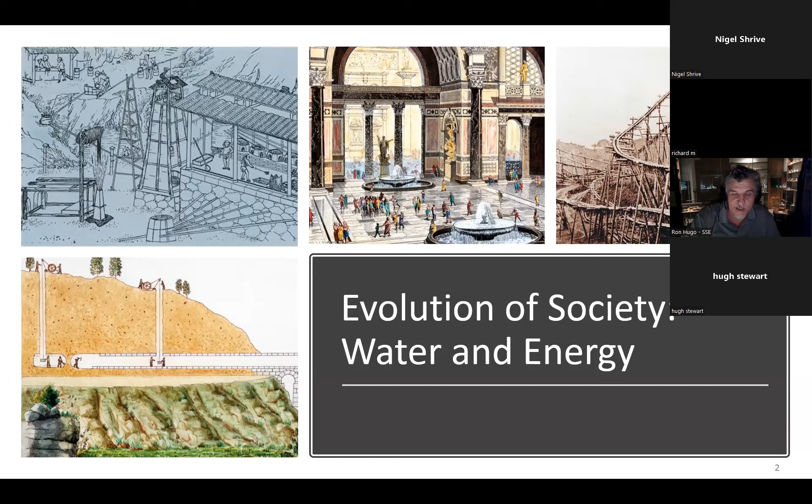So if you look back at the evolution of society, there have been a couple of things that have been very instrumental in terms of that evolution, and two of those have been potable water as well as energy. And we can look at a number of different civilizations that developed as a result of the benefit of pipelines. And one of the oldest pipelines is the Aqua Appia, and that was built by the Romans, and it was in 312 BC.

And what it enabled was fresh water to be brought into ancient Rome. So there's the Colosseum, and then there's a very large aqueduct that comes through. But the water was brought into the cattle market, which is right up in this area here. And you can actually still go there today and see the area where they were bringing that water. So they brought in fresh water, and that enabled Rome to grow into the largest city at the time, or in human history to that point. And part of it was the fact that they had good water and they also had good sanitation.

Now, flash forward a couple hundred years and we get to ancient China, and the ancient Chinese, they needed salt. They were using salt for preserving food and for many other purposes for cooking. And the place where they were getting the salt from was from salt brine. And the process that they used in order to boil off the water and have just salt at the end was using natural gas or methane that was coming out of the ground.

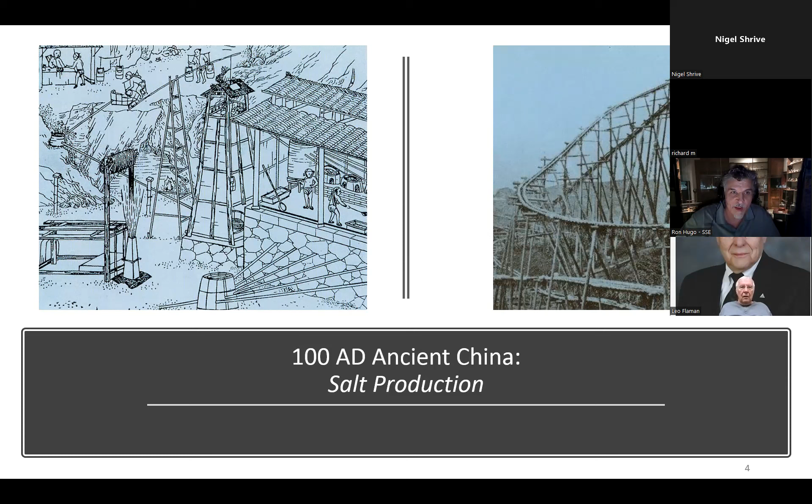So they were using bamboo pipelines to route both the natural gas as well as the salt water. And it was a very, very big operation. And that enabled their civilization to advance through the use of these round conduits that we today call pipelines.

Now, going even further forward in time, we look at the evolution and the development of Canada, and one of the things that enabled the development of Canada was the Homestead Act, and that was whereby people came out and they were given a quarter section of land, and they had to develop it within a certain amount of time. And if they were able to turn it into land that was cultivated and produced, they were then given that land through the Homestead Act.

And the picture in the upper middle there, that's actually Calgary, and I think it was taken in 1880. And so that's the rail station of the Canadian Pacific Railroad, which is down by Fort Calgary today. So if we look at the gas distribution system within Alberta, it actually occurred in two different waves. One of them was occurring in around 1912, and that was with the discovery near Bow Island, which is near Medicine Hat. And that discovery came as CPR was coming through. They were looking for water for their steam locomotives, and they discovered gas as a result of that.

And then individuals went back and they produced that field, but it took 86 days to build a pipeline from Bow Island to Lethbridge and then to Calgary. And so Calgary received the first natural gas in 1912, and it took about a decade later for Edmonton to receive the natural gas, and that came from Viking, Alberta. And the reason for the delay was because World War I occurred in the interim there, and that delayed the development of the pipeline going into Edmonton.

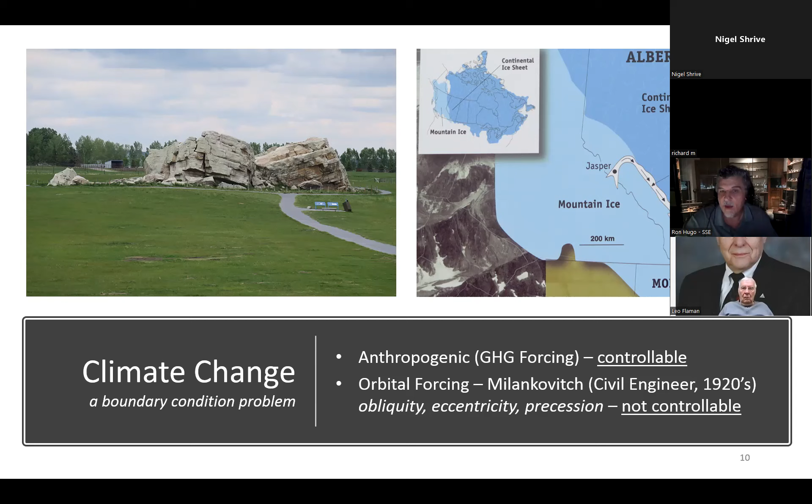He was a brilliant mathematician, did all kinds of calculations with orbital dynamics, and he came up with a theory saying that one of the main drivers of the glacial interglacial was this orbital forcing, which ultimately is due to the obliquity, the eccentricity, and the precession of the Earth's orbit. And so when you look at climate change, really it is a boundary condition problem. The Earth is just a thermal fluid system. You change the boundary conditions, you affect the way that it behaves, the average temperatures.

And so if we are to get to net zero by 2050, we need to ramp this up. So we're going to be transporting a lot of CO2 around. And how are we going to be transporting it? Well, one of the ways is going to be through pipelines as well. So anyways, what we're doing is we're using technology to address the greenhouse gas forcing.

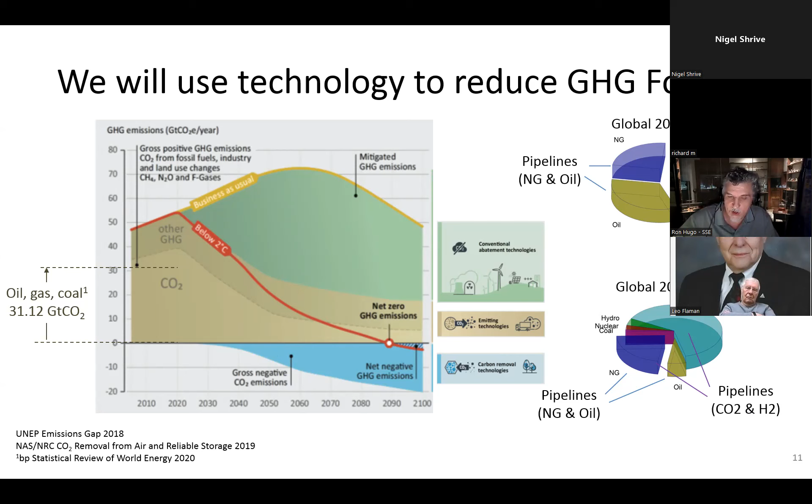And what we're seeing is a transition from natural gas and oil. Hydrogen is being proposed as one of the candidates that we can use as part of energy transition, which I'll talk a little bit more in the next slide. So this is one of the visions for energy transition, and what it involves is moving off of our carbon-based fuels, but replacing it with other sorts of gaseous and liquid fuels, ranging from hydrogen to synthetic fuels, biofuels,

ammonia. Ammonia typically, if you're going to be shipping this energy in liquid form from one continent to another by ship, but there may be some transported within the continent as well, and certainly a lot of CO2. As I showed in the last slide, we will be shipping more and more CO2 for various purposes, and so pipelines will need to be able to handle that as well. So that's the part that we can control.

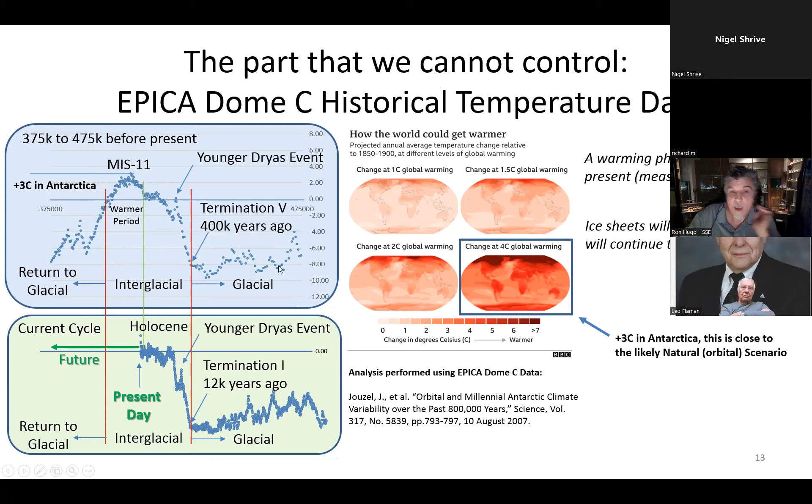This is in Antarctica. It was about 3 degrees Celsius above the pre-industrial, so the Holocene. So we're probably about a third of the way there, if we use this as a predictive thing. So what does that mean for infrastructure and for engineers?

Well, one thing for certain is it's going to introduce a lot more liquid, a lot more water into the Earth. So we will have water vapor in the atmosphere, and the oceans will rise. We'll have increased flooding. And so our infrastructure is going to have to deal with a lot more increased flooding.

And here I have a picture of the flooding that occurred last November near Vancouver in the Sumas Valley. And the Trans Mountain Pipeline actually makes its way right under where this area was flooded. Now, luckily, Trans Mountain is a liquid line, and so it stays in the ground.

But had it been a gas line, it would be possible for it to pop up and out of the ground, which then results in undue stress on the pipeline, creating threats and concerns. And there were also regions where there was significant washout of the Trans Mountain, and that's why it was shut down for a fairly extended period of time.

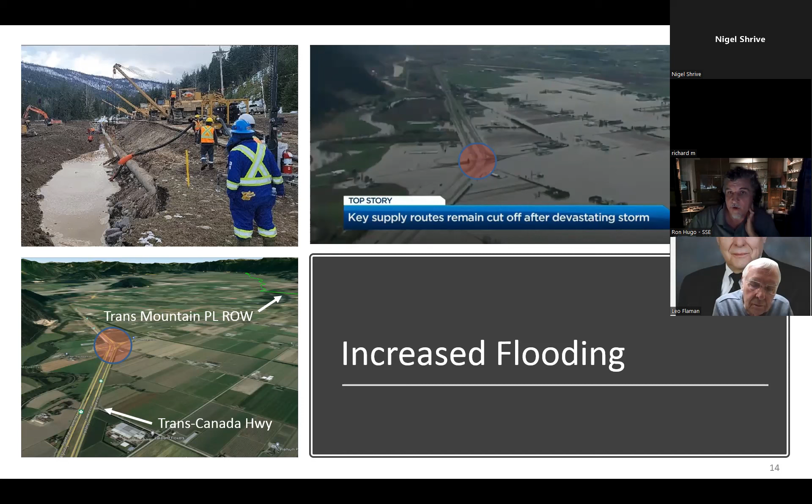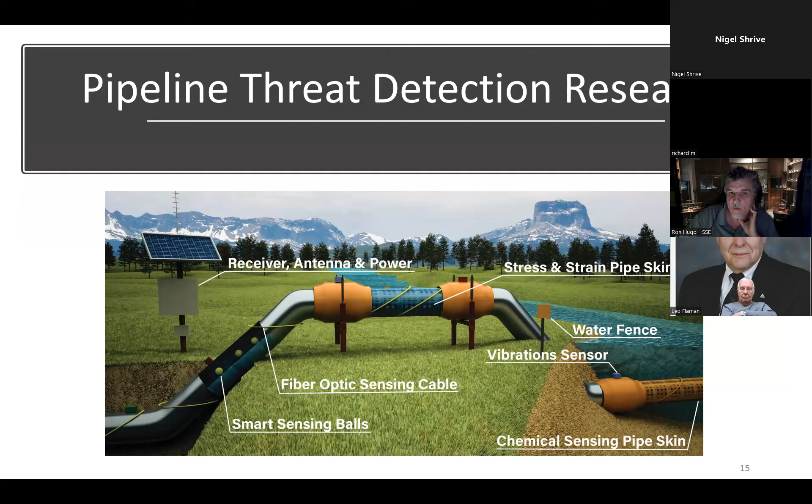So what are we doing in order to address this? Well, we're looking at pipeline threat detection research, and that's what I want to now spend a bit of time talking about. We're looking at many different ways of being able to measure the state of the pipeline, and to be able to determine whether or not it's in a scenario where there could be problems arising. Ideally, being able to determine those concerns before you have an incident, before you have a loss of fluid event.

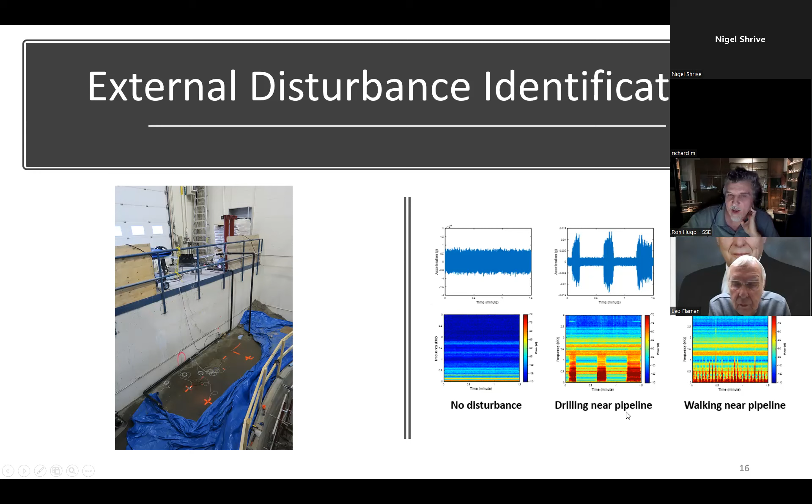And so one of the experiments that we were doing here was external disturbance identification. Could we distinguish different types of external disturbances based on the sensors that we had on the pipeline? And so on the right, you can see some of the data streams that we collected. So no disturbance, drilling near a pipe, walking near the pipeline. We had running, we had all different types of activities, but we collected enormous amounts of data.

And then what we did is we used artificial intelligence, machine learning approaches. And this is where the trick in all of these things is. You have to process the data in the right way. And so that's where we spend the majority of our time, is understanding the best way to process that data. But when we do that, we're then able to determine the external threat fairly accurately.

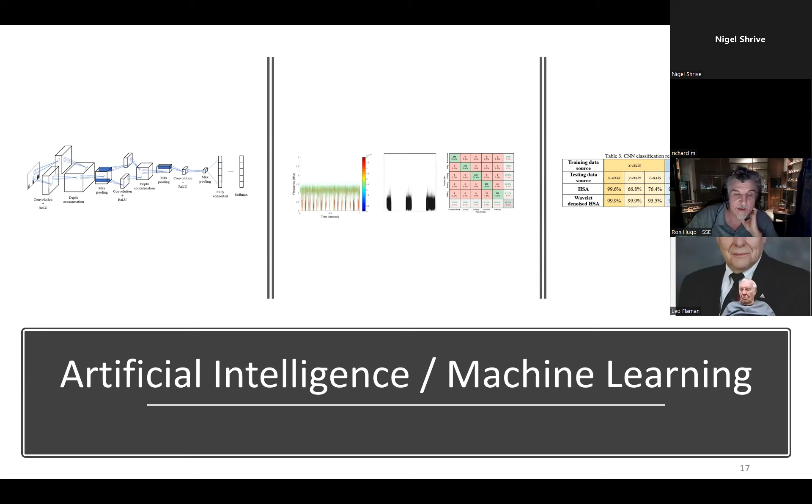And we're using triaxial accelerometers in the measurements that we're using. Different signal conditioning approaches result in better results there. But we're able to detect all of the different disturbances, and not only know that there's a disturbance there, but we're also able to identify what type of disturbance it is. So that's one of the things that we've been working on.

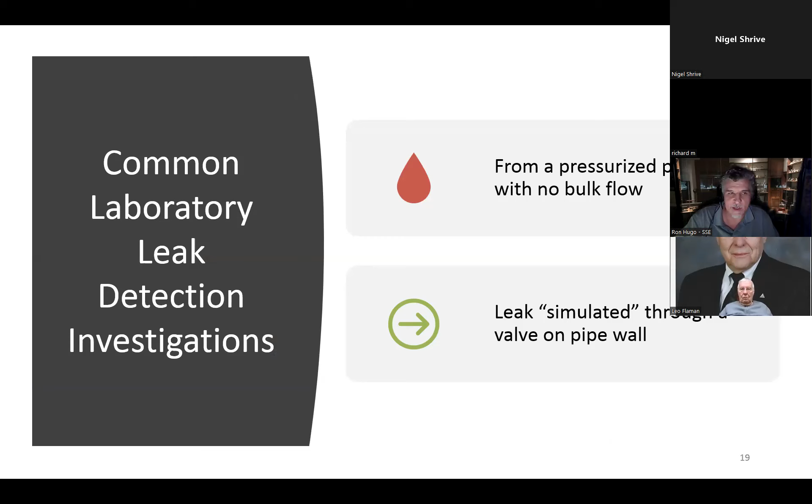So common laboratory leak detection investigations involve a leak from a pressurized pipe. Sometimes there's not even a bulk flow within the pipe. It's just a pressurized pipe with no bulk flow going through it. And the leak is oftentimes simulated with a valve on the pipe wall, which is not a very good boundary condition. It's far from reality of what you would have in an actual leak event.

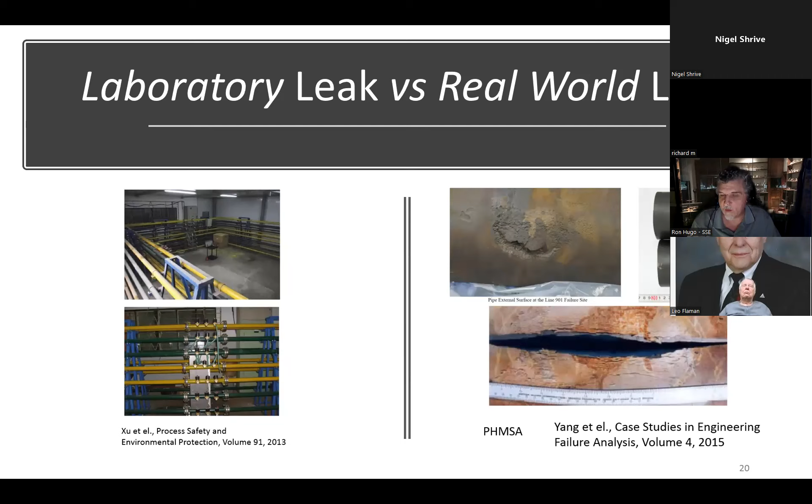They could be axial, they could be circumferential. And so the geometry of a leak is much more complicated than what we normally are simulating in our laboratory investigations. And so what we ask is, is there a better way that we can study leaks, ideally by trying to replicate the morphology of what actually occurs when you have a real leak.

And so in order to do that, what we're doing is designing and building a new flow facility. It will be in what we call APRIL, the Advanced Pipeline Research and Innovation Laboratory. The unique aspect of this flow facility is, first of all, we have multiple loops or lines where we can do different investigations. We'll be able to flow liquids of various viscosities at up to about 50% operational Reynolds number that you'd find in a transmission pipeline.

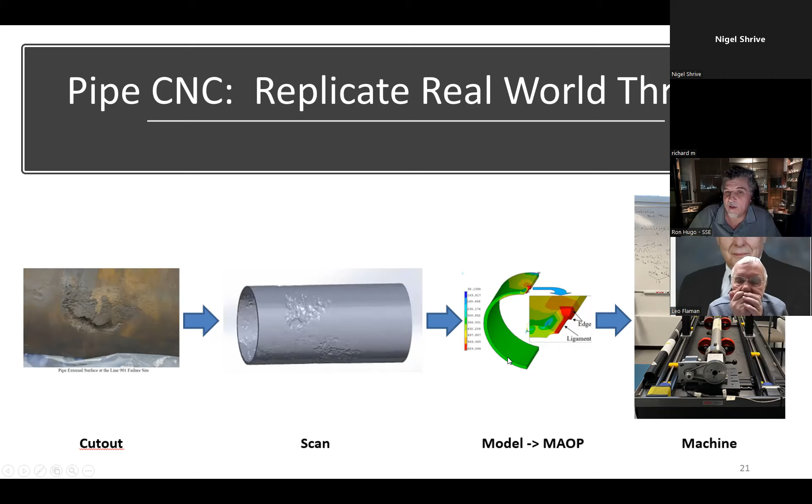So in this earlier slide here, when I was showing you the finite element modeling, we want to know that our pipe will fail at, let's say, 40 psi, so that we can slowly bring the pressure up when the damaged pipe section is in our flow facility, and then study the dynamics of the leak itself. And we can heat the fluid and we can cool the fluid. So we have a lot of flexibility with this flow facility, and we're hoping that it'll be operational sometime in the spring semester.

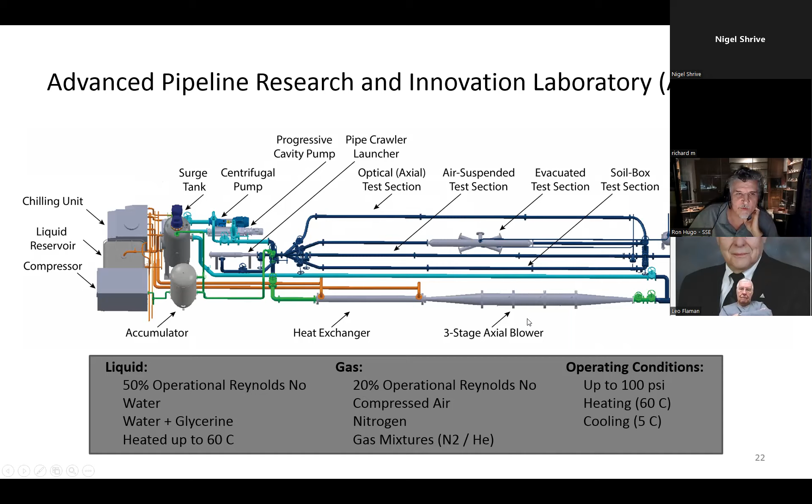So that's APRIL. And now I want to shift gears a little bit. I did touch on hydrogen blending. Here we have nitrogen and helium because I don't want to put hydrogen in this flow facility. But in order to study hydrogen, we do have another smaller flow facility that we've been using. And this is looking at hydrogen blending scenarios for customer side piping. So there's a lot of discussion about blending hydrogen into the natural gas distribution system.

And one of the things that you find when you look at this is that when you look at the gas coming into your house, for example, you can have a wide range of conditions. First of all, it depends on what the draw is on your natural gas. So if it's just your pilot light, the Reynolds number of the gas flow here is very laminar. It's around 32. Your stove, your oven, your dryer, your furnace, once you get the furnace on, you'll go up into the transitional, into the turbulent flow regime. So the flow dynamics change quite significantly based on what appliance is drawing the natural gas.

The other thing is that you can have a flow scenario where you have flow. If you turn off all of your appliances, you have no flow. And so you can have a scenario where there's no flow for fairly long periods of time. You can have horizontal flow, you can have vertical flow.

And in terms of the Reynolds number, the flow could be laminar, it could be transitional, it could be turbulent. The other thing that we should say is natural gas, the density is around 0.7. And if you look at hydrogen, the density is much, much lower, 0.08. So we have a scenario where we can have stratified flow depending upon the Reynolds number at which we're flowing, which all introduces interesting dynamics into what really is going on within the pipe.

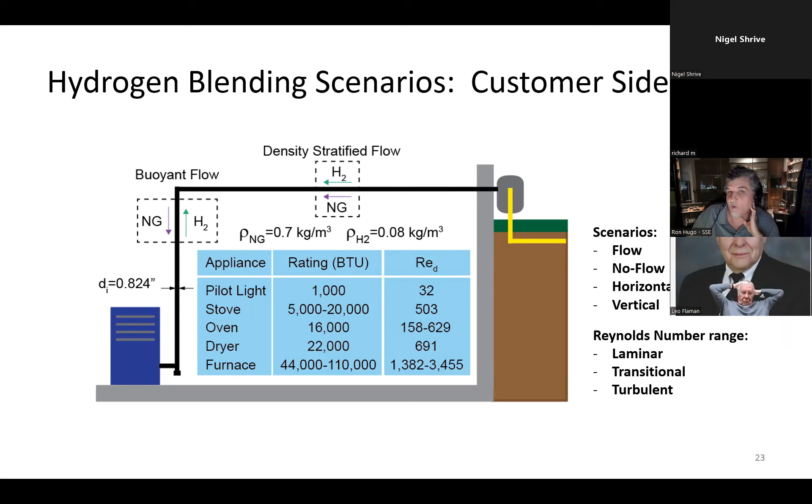So in order to investigate that, what we've done is we built another flow facility. This is a much smaller one from the one that I showed you earlier, April. But what we can do with this facility is we can charge it with whatever kind of gases we want. And so typically what we've been investigating has been methane with hydrogen. And we look at various blends. So we'll look at 5% hydrogen, 10%, 20%. We've gone up to 30%.

And we also look at proxy gases as well. Sometimes we'll look at nitrogen and helium, and they actually do a very good job of mimicking the behavior of what you would get with methane and hydrogen. So we can put whatever kind of gas we want into the system.

We can do tests where we intentionally initiate a leak, not using the natural process. This is using a valve, but we can initiate a leak so that the gas comes through the system, comes up into this test section, comes back down, and comes through a pump. So it's basically a closed flow loop where the gas is circulating. We can change the Reynolds number. We can stop the flow, observe what's happening with time.

So how do we observe? The way that we do it is we have an optical measurement where we're transmitting down the length of the pipe. And what we do is we use a collimated helium neon laser beam. The inner diameter of the pipe is around 0.8 inches. It's a 3/4 inch black pipe that you'd find in your house. And with that, we have what's called a Shack-Hartmann wavefront sensor, where we're able to measure the optical aberration on the light going through the system.

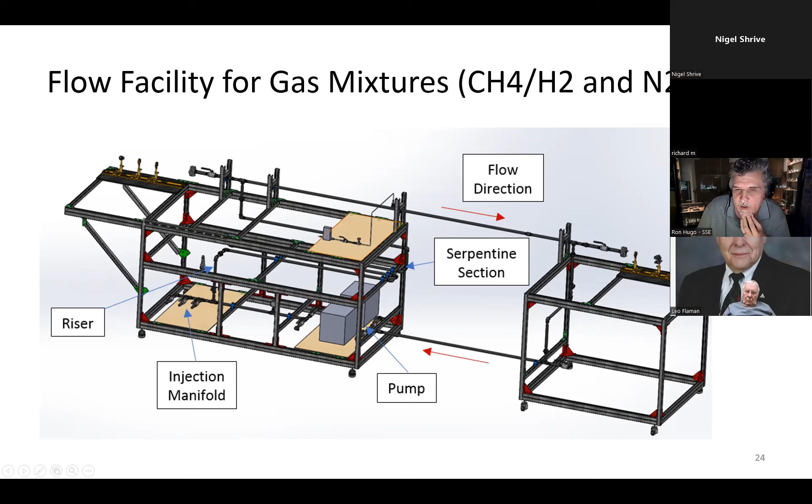So what I'm going to show you now, this is a video collected after charging the system. We evacuate it entirely with the vacuum pump, and then we charge it with methane, and then we top it up with hydrogen. And so when we top it up with hydrogen, the hydrogen goes into this area here, and it doesn't diffuse very rapidly. It actually likes to kind of sit right close to where you inject it. And then what we do is we turn on the pump. And so the video that I'm going to show you is what is collected when you look down the length of the test section once you start the pump.

And so here will be the start of it. And you'll see, so the pump is on now. This is the intensity of the beam. I've sped this up. The beam disappears completely. That's the first pocket of hydrogen coming through. That's the second pass of hydrogen coming through. So the hydrogen is going all the way around our flow loop. It takes about 30 seconds for the hydrogen to make it around the flow loop once.

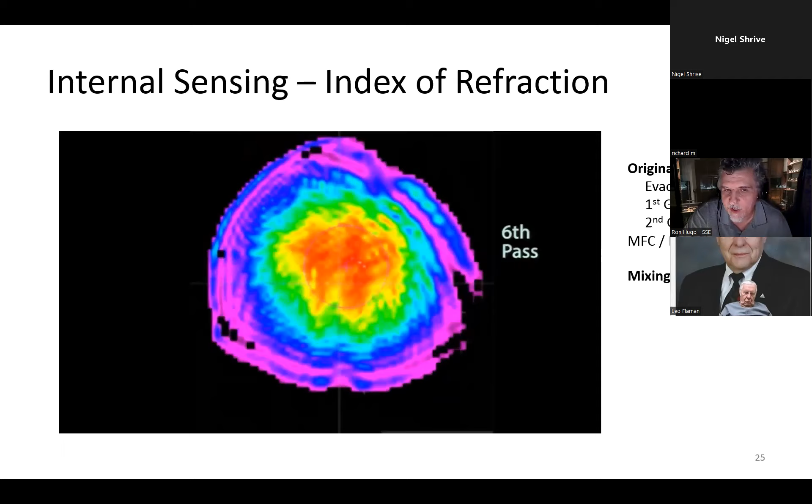And then as you keep going, what you'll find is the beam doesn't disappear. And that's because even though we're at a laminar Reynolds number of 650, we have around 20 elbows in this system. And so those are generating separated flow, resulting in mixing of the hydrogen and the methane. And so with each additional pass, you'll see that the optical variation is not as significant.

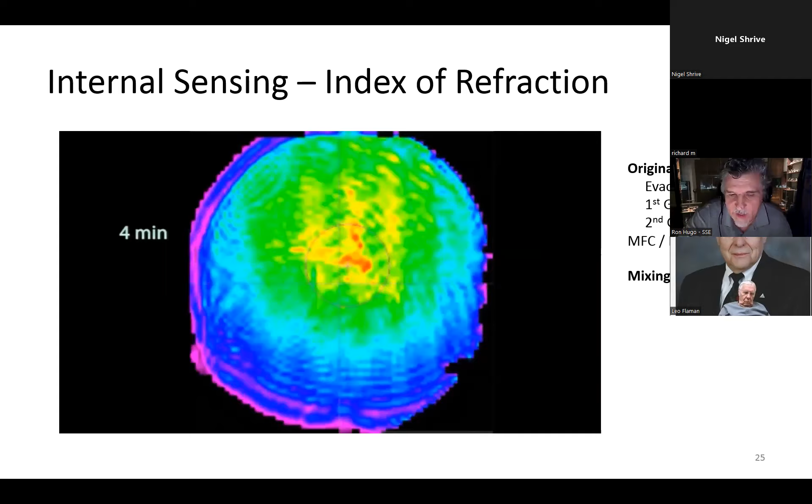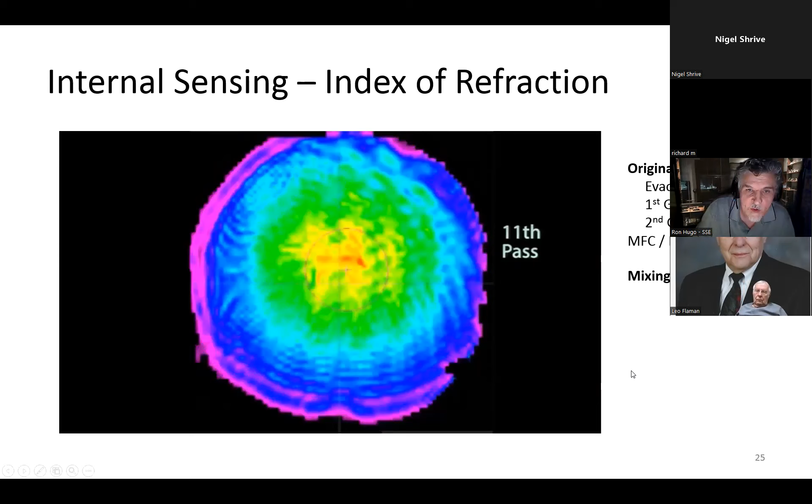And then eventually, if you run this long enough, you won't even be able to see a change, because then you're in the fully mixed state of the system, which incidentally is probably what you would get. Well, not probably, it is what you would get with the distribution system within the city if they were to deliver the natural gas to your house. So that is what the screenshots look like if you look at it at various points in time.

But what we can do with this information is we can do quantitative analysis of it, and we can start to understand how long it takes to mix, what happens if you turn the system off for, let's say, a week, and then your furnace comes on again, what type of thing is happening within the flow. So we're able to get quantitative measures out of this data to understand what will be the character of these blends coming into your house.

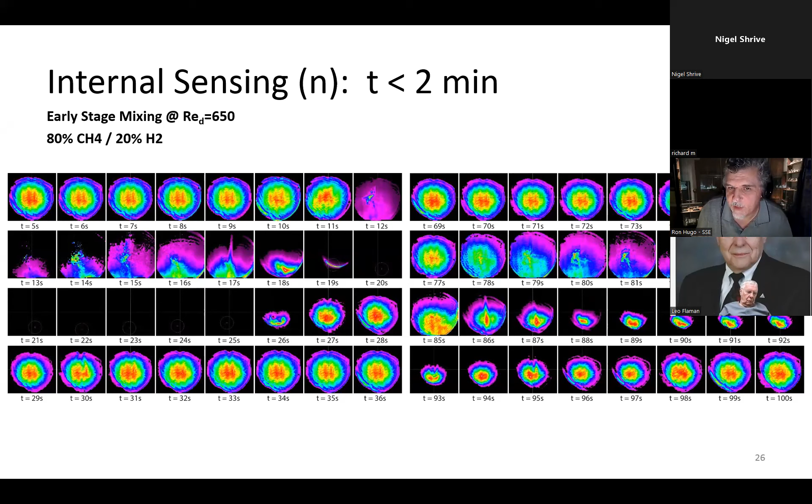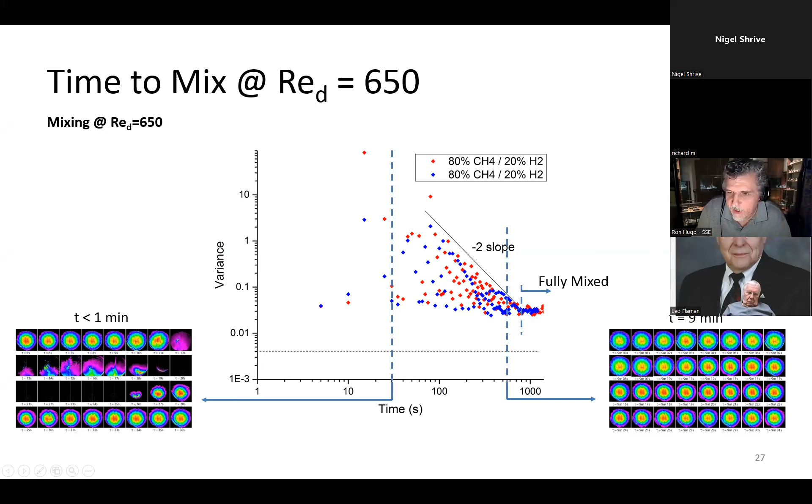So that's the initial charge in the mixing, which you probably would never find in your house if they were bringing in this type of a blend. The other thing that we can do, let's say we've mixed it, fully mixed, we turn the pump off and we let it sit for a week. And then we come back and we turn the pump on for 30 minutes and then we turn the pump off. So we perform that experiment and we look at what's happening.

Now, this data might look significant in terms of, oh, there's a lot of stuff going on. You got to remember here, the variance was going up to 10. Here I'm showing variance 0.04. So very, very moderate optical activity coming through the system. But again, what we can do, we can get an understanding as to how much stratification might occur within the system if you let it sit.

So what would stratification mean? Well, it might mean that the hydrogen moves to the high points within the piping that you have within your house. What is the implication of that? Well, as soon as you turn on your furnace or something like that, that gas is going to come through fairly quickly. You might have a higher concentration of hydrogen that the furnace might have to deal with. But after that, it'll go back to being a nice mix coming from the gas distribution system.

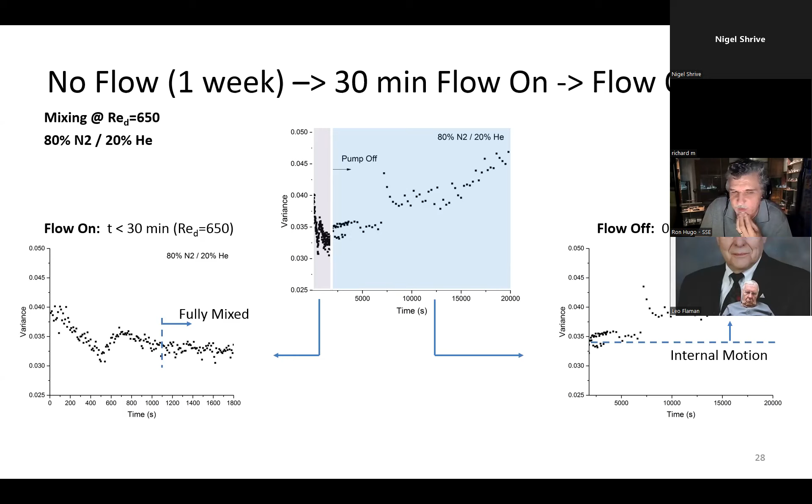So anyway, we can do a lot of investigations with this. And we just launched a 2-year project on this. It's an NSERC Alliance grant, so we're going to be able to study it in a lot more detail. The data that I'm showing you here was just collected during some investigations last summer. So coming back to the whole triple helix, energy, water, and quality of life, they are all kind of linked fairly closely together.

The importance, however, is that we do need to have a stable, reliable source of energy, and pipelines are the main way that is being delivered to us, especially when you're looking at the ability to store energy, such as we would have now. A lot of the natural gas that we're using is coming from underground reservoirs where the gas is being stored, and then it is being provided to the city for when we have high demand. And so as we transition to some of these other fuel sources, we need to think about that and having ways of storing to give us the high quality of life that we've been experiencing.

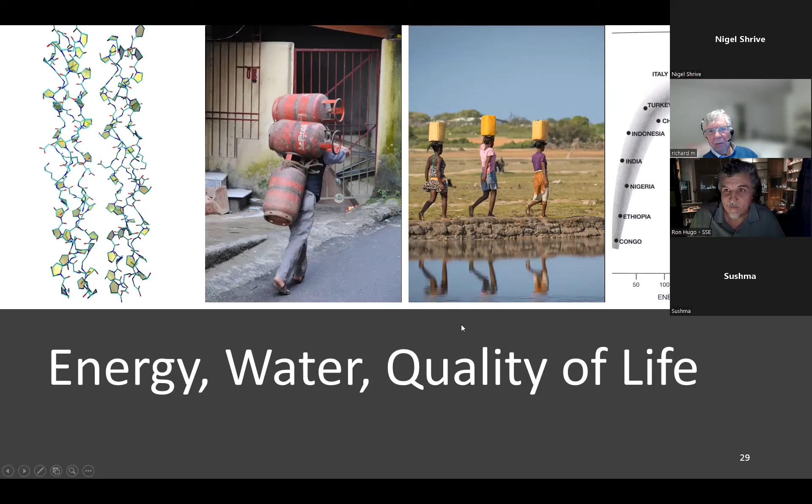When I saw your first couple of slides, Ron, about the 12-year interval between bringing natural gas into Calgary and into Edmonton, I used to manage pipeline crews all over Alberta, and those guys north of us were a lazy bunch. So it doesn't surprise me that it took them 12 extra years to get the gas supplied.

I like looking at the old photos. This is the one from the Glenbow, and then, right, that's off of Google. It's very interesting to see where the pipelines were going. I couldn't find anything like that for the Bow Island one, though.

Well, I don't have a photograph, but I have a doorstop that was taken from a section of that pipe. From the Bow Island. Yeah, old Coste, when he built it, it was cut up 100 years ago. It was cut up, and I used to use one of them as a prop to keep my door open. And what was the integrity of it like? Pretty good. Really? Oh yeah. Oh, well, it's good without any coating or anything. Did it have a coating? No. Probably not. No.

Ron, while we're waiting for somebody to put the question into the chat, can I just ask a quick question? Absolutely. I know in the lab it's kind of problematic to look at full hydrogen concentration in the line, but could you maybe just comment about how viable that is if we were trying to transport hydrogen to distribution centers? Well, there are a couple of components to that.